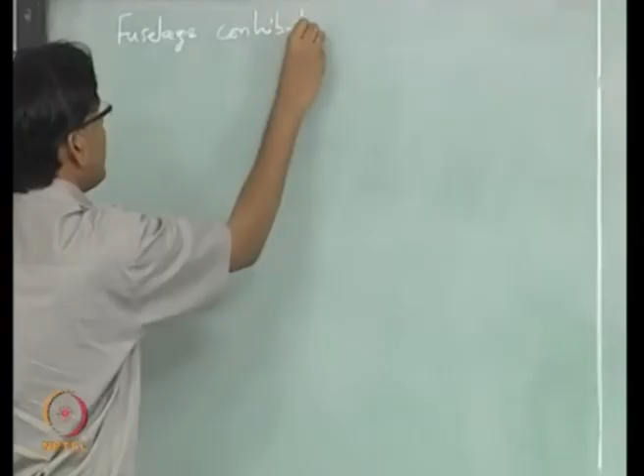Okay, so today we are going to look at fuselage contribution to CM alpha.

So there are two effects. One is purely because of the fuselage, and there is another effect which is wing-fuselage interaction. So flow over the fuselage is going to get affected by the wing. Similarly, fuselage is also going to contribute to wing contribution to pitch stability.

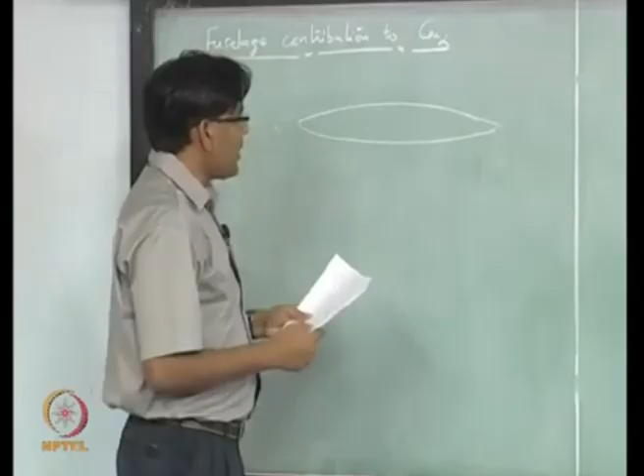As you know, most of this course is going to depend upon the data coming from the wind tunnel or based on some empirical relation. This one is particularly difficult. We just have some estimates provided by people at different stages.

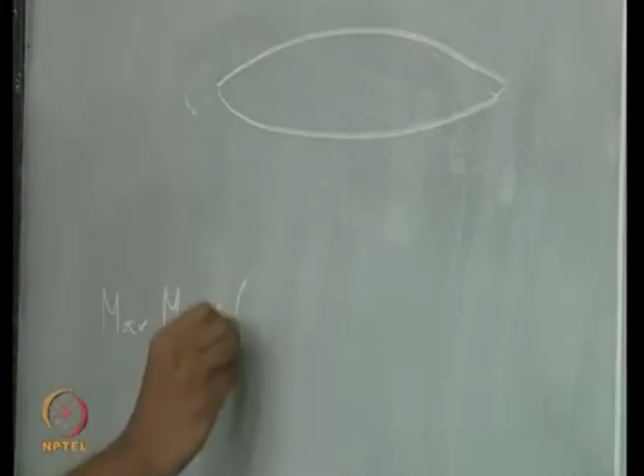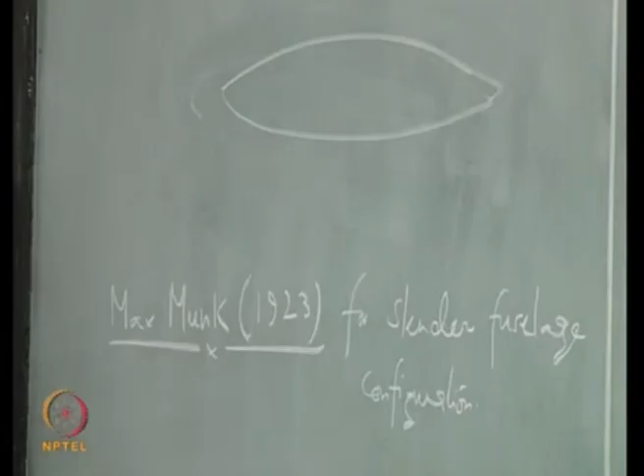So there is one person called Max Munk, who was the first person to study the effect of fuselage on pitch stability, and he gave a formula in 1923 for slender bodies. Based on his experimental observations, he gave an empirical relation.

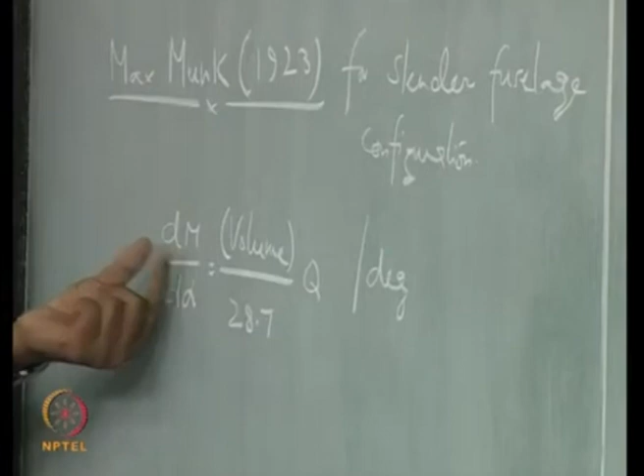This is per degree. M is the pitching moment here and q is the dynamic pressure.

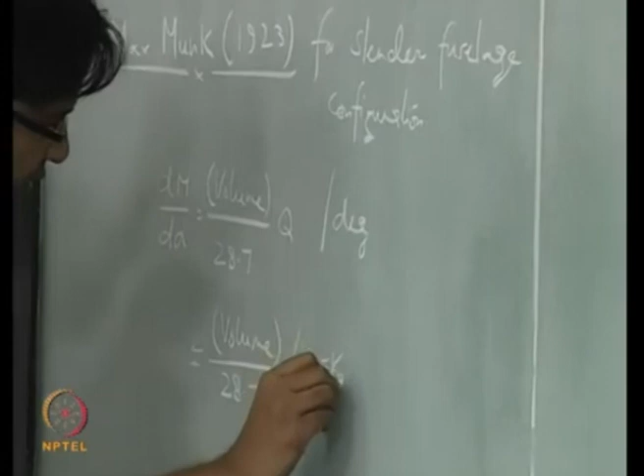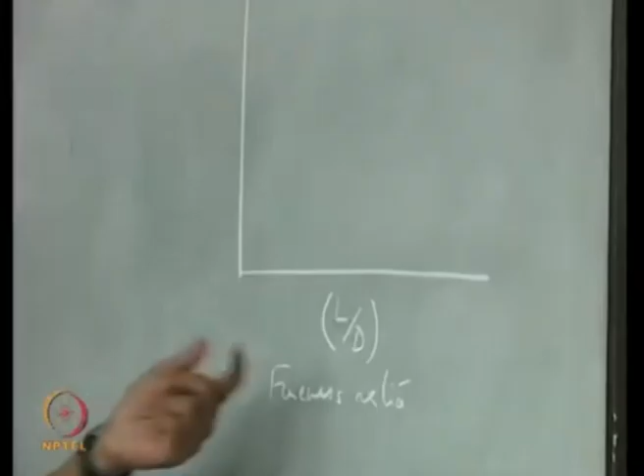Later on he also added another factor to this. This factor was to account for the slenderness ratio, also called the fineness ratio. If you want to look at how this parameter varies with the slenderness ratio, this is not lift over drag, this is length over diameter.

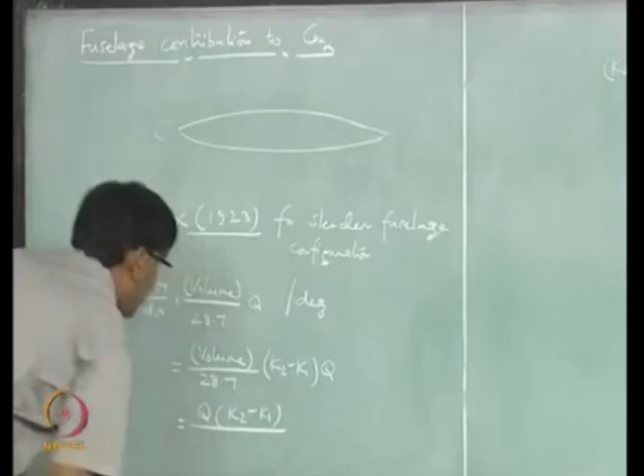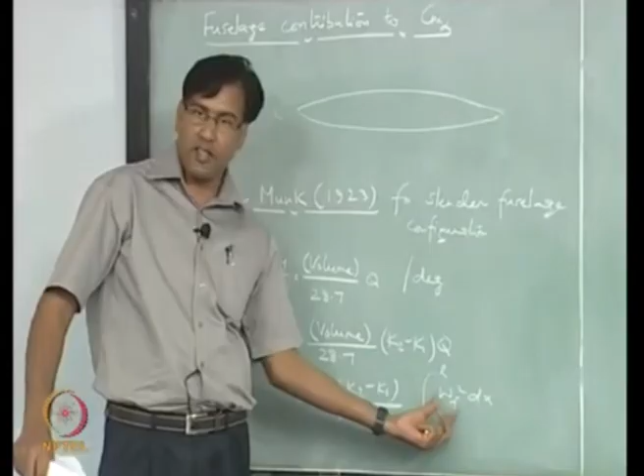Now this is like a volume. So width of the fuselage at any particular section into dx, this gives you, so it's like a squarish section, into an elemental length along the length of the fuselage, and you have to integrate this so that this becomes the volume.

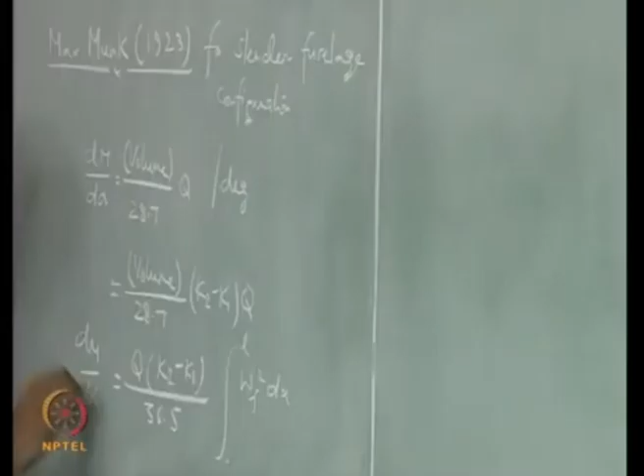They are different. You have to remember that all of these relations are based on experimental observations. So this is the corrected version of this one. If you want to talk about bodies which may not be symmetric, this is how you have to find out the volume.

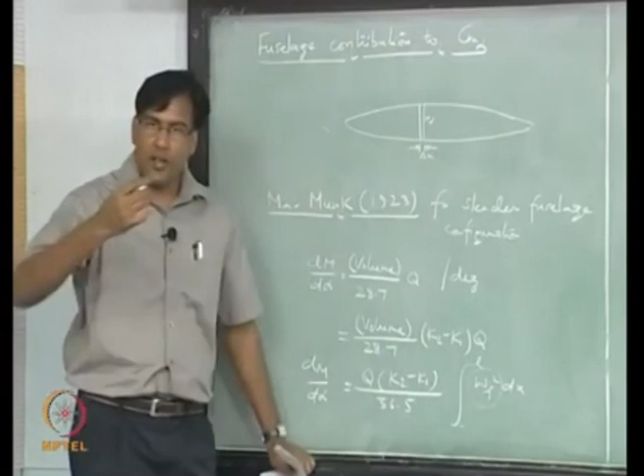So WF can be a width at any section, and you multiply it by this delta x. WF is the width of any section. So this looks like a cross sectional area into the length element dx. It's like taking it as squarish.

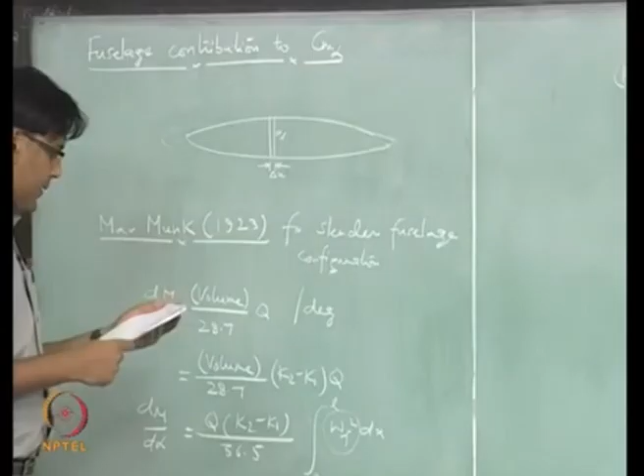You can take it as how it is. Because again, I'm repeating it, it's an empirical formula. This person gave it. If you want to know further, that may have been taken into account in this, but what he did not account for was the local flow disturbance.

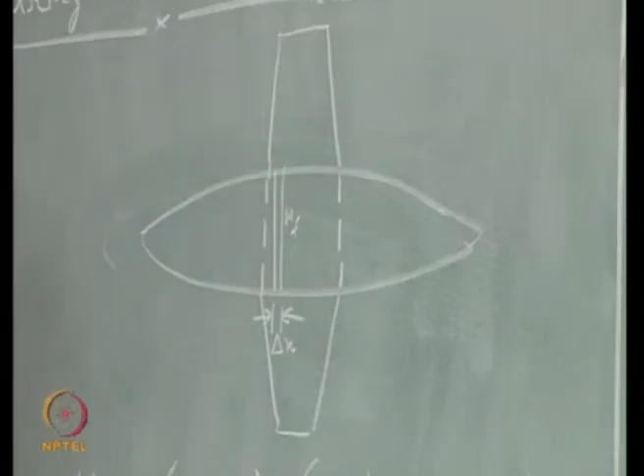So flow will be disturbed ahead of the wing and behind the wing, because behind the wing there will be a downwash created, and in front of the wing, upwash. So this portion of the fuselage, the flow that it is going to see is going to be different from what this portion is going to see.

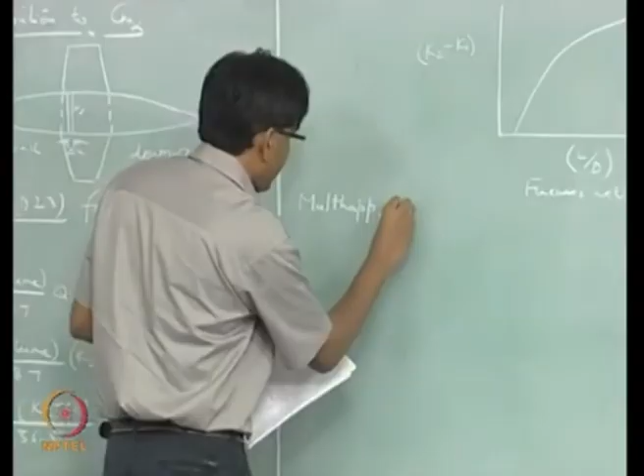And there is this person who gave an empirical relation accounting for this effect coming from the wing. So wing is the one which is going to disturb the flow around the fuselage, and that effect was taken into account by Multhopp, and the relation that he gave is something like this.

Remember, we are only trying to get an estimate because we are still at the design stage. Only after we have gotten an estimate can we build one small prototype and put it in the wind tunnel, and then after that compute all the derivatives.

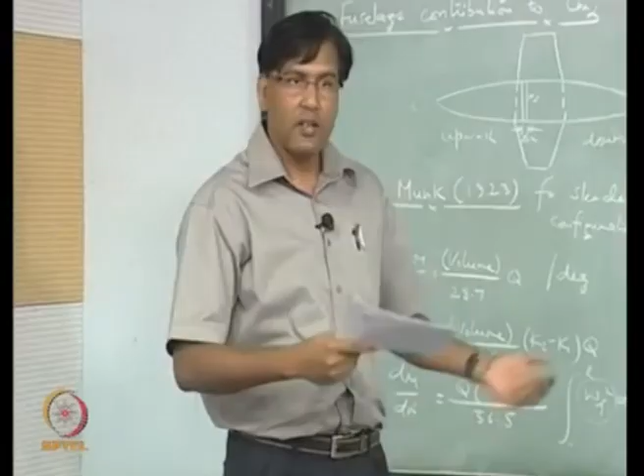CM alpha is also measured in the wind tunnel after you have done the initial design, and then you are going to see whether it is matching with what you started with or not, isn't it? So this is still at the initial design stage.

Yeah, I will tell you. So beta is the local angle of attack.

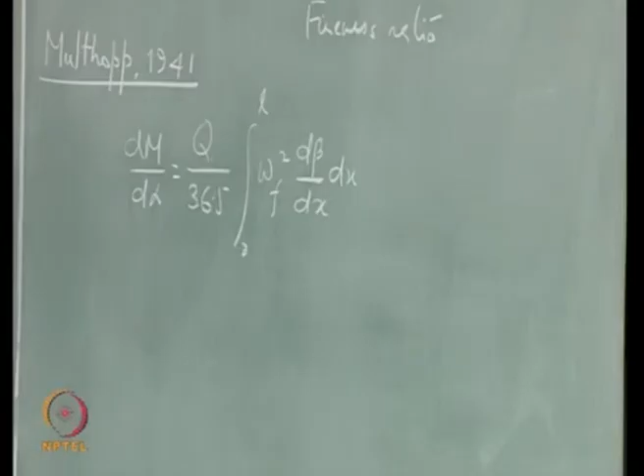Which is alpha of the fuselage reference line, and we are writing it as alpha, right, plus alpha I, which is like the effect coming from the wing.

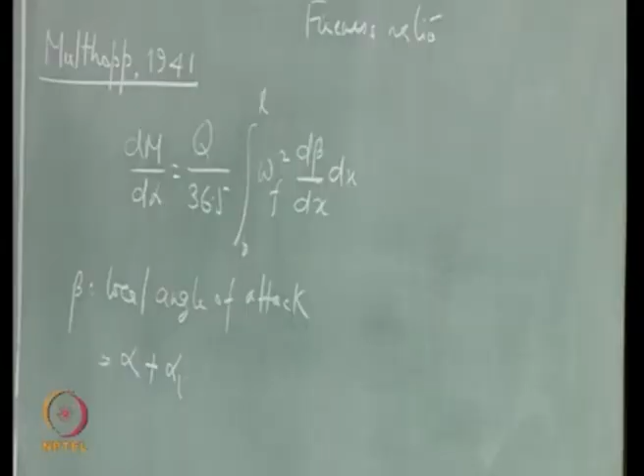Okay, so clearly in front of the wing is one, this derivative is 1 plus d epsilon over d alpha, right, and behind a rough estimate.

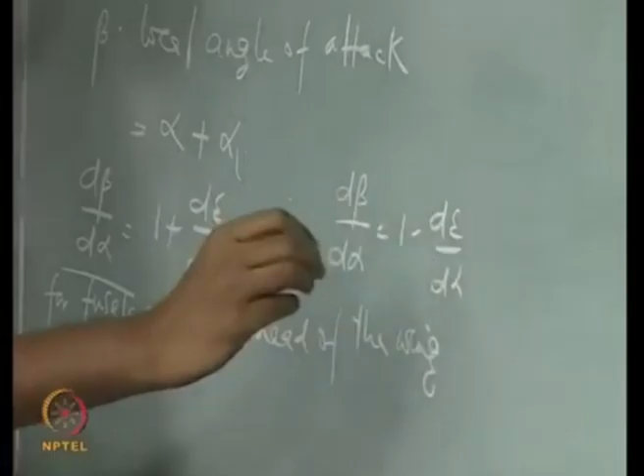So, for fuselage portion ahead of the wing, right.

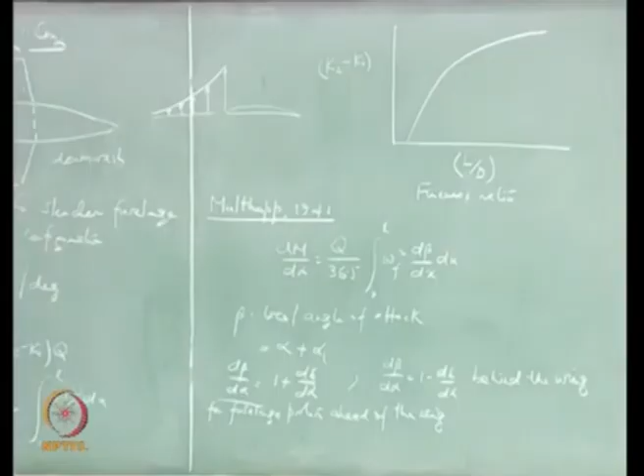If you remember, we showed that the maximum upwash is going to be around this area, right, and then it is slowly going to taper off, right. So we looked at this picture where we saw this component of velocity like this, right. This was upwash in front of the wing.

Behind the wing, the downwash is going to be maximum near the wing trailing edge, and then it is going to slowly diminish.

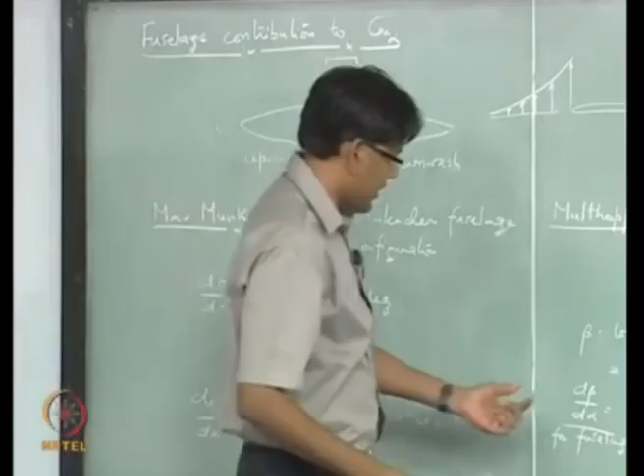So we have to be particularly careful about sections of the fuselage which are close to the wing, right, and thereby the empirical relation—again there is a curve which tells you how this is going to change as you move along the length of the fuselage away from the wing. So if you are close to the wing, then this effect is going to be more, and if you are away, it is going to be less.

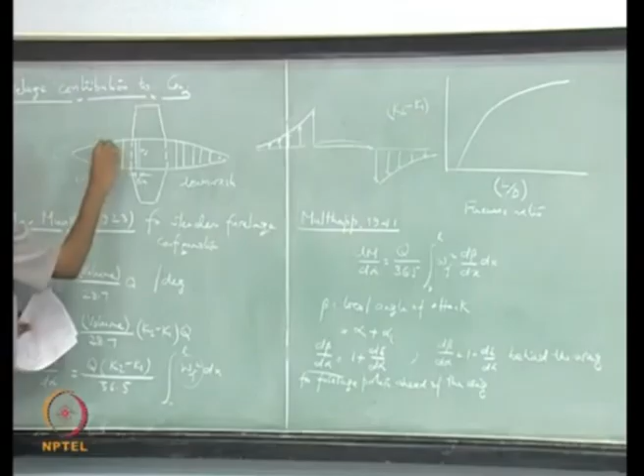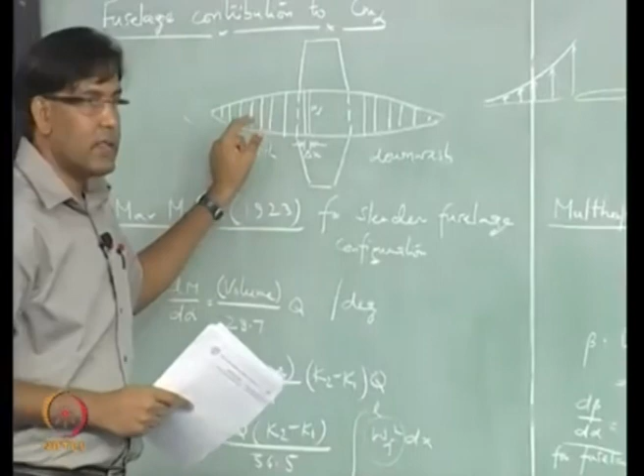Now, this is going to be different for each section, you have to remember that, and for that the relation, the empirical relation is given. So you can choose from a plot what section you are in, how much away from the wing trailing edge, or how much in front of the leading edge, right. So depending on that you can find this from an empirical curve which is given to you, okay, and calculate what this derivative is.

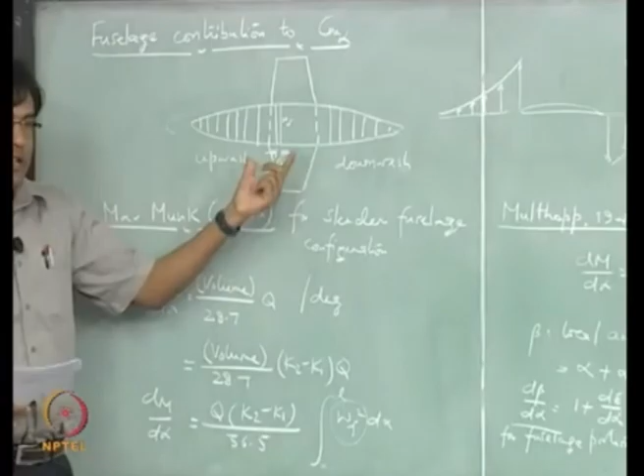Okay, so this was the effect of the wing on the fuselage pitch stability, right.

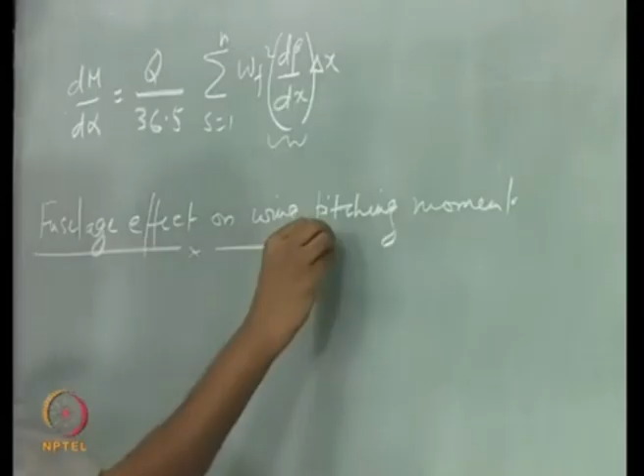Now fuselage is also changing the local flow around the wing, right, so it is also going to change the pitching moment which is created because of the wing, isn't it. So the interaction is both ways: wing is affecting the fuselage, fuselage is affecting the wing, and that effect can be estimated.

It can be a bad estimate, okay, but you need such estimates because they are going to be useful in determining the stability or the equilibrium of your initial paper aircraft, right. You are starting with some design and you want to find out all the parameters which are going to affect the equilibrium conditions and the stability.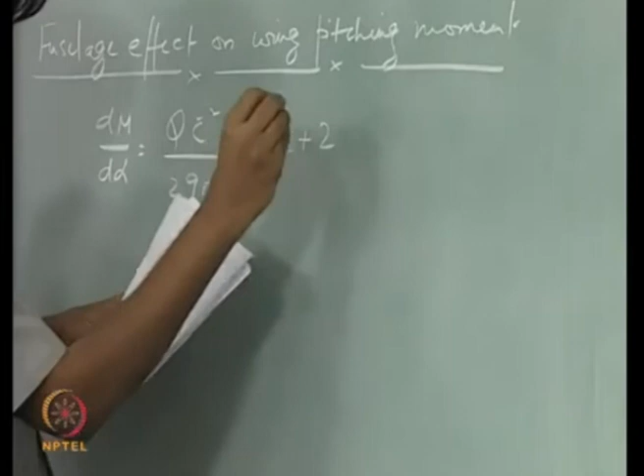Okay, so this effect is given by this formula. All of these are estimations, okay, you have to remember that. The correct value can be found only when you have put your prototype in the wind tunnel and measured the data accurately, right. Otherwise you have to trust these estimates.

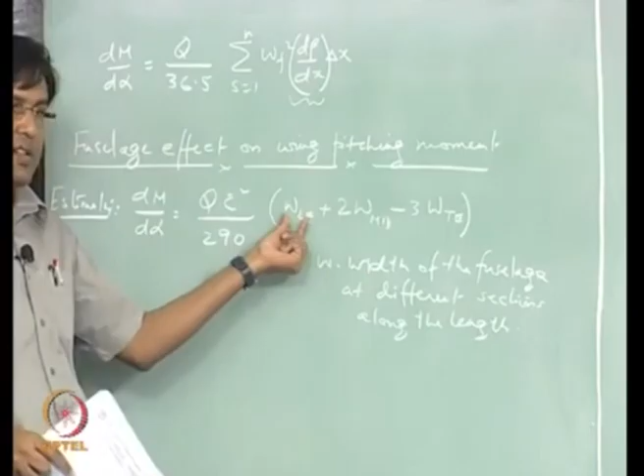So width of the fuselage at the wing leading edge location, okay, width of the fuselage at wing mid chord location, and this is the width of the fuselage at the wing trailing edge location.

So now from this you can also find out what is DCM over DCL, that is what we are doing in all the cases.

Now since this is for a body of revolution, it applies to both fuselage and the engine nacelle.

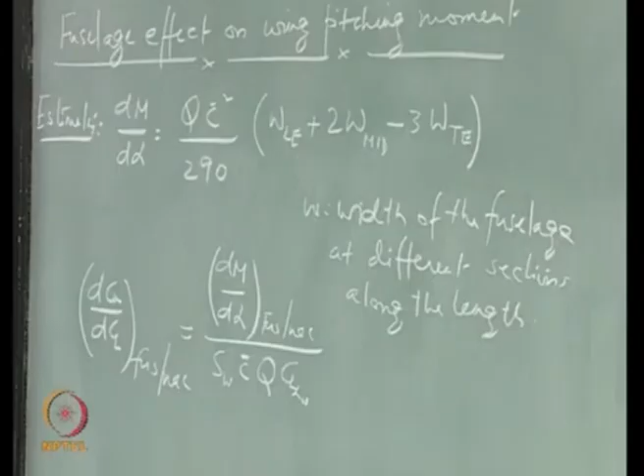Right. If you want a ready formula with less accuracy, then you can use this.

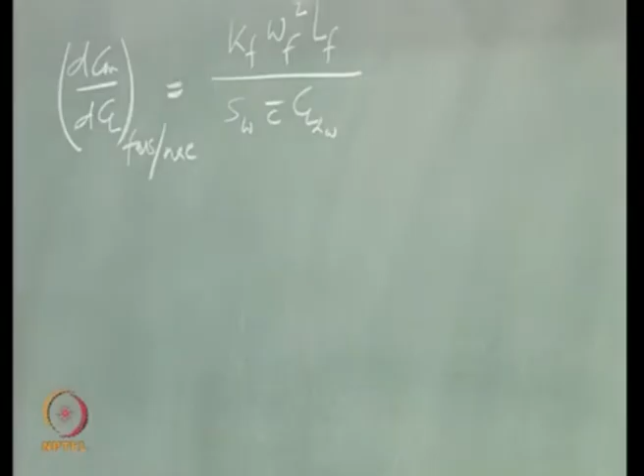So, LF here is the fuselage length, overall length, and WF is the maximum width of the fuselage.

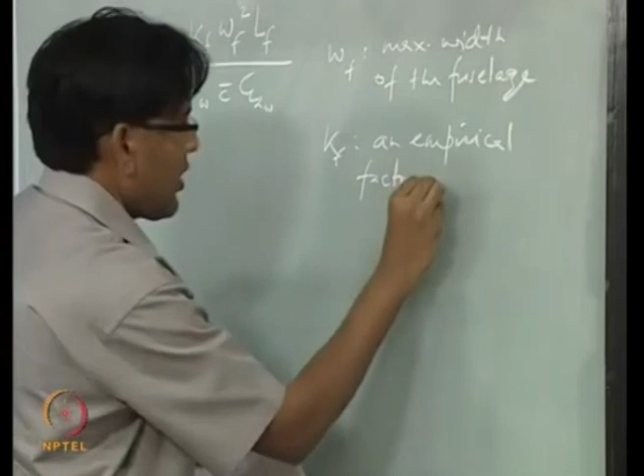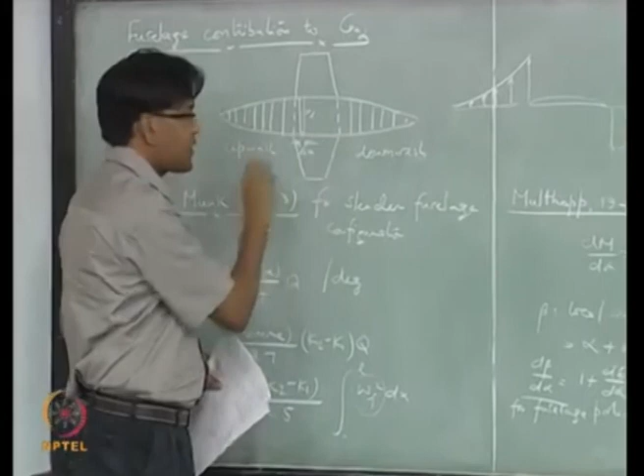Now KF is given by a curve which gives a relation between KF and position, specifically the quarter of root chord. Okay, at this chord, take this quarter of that.

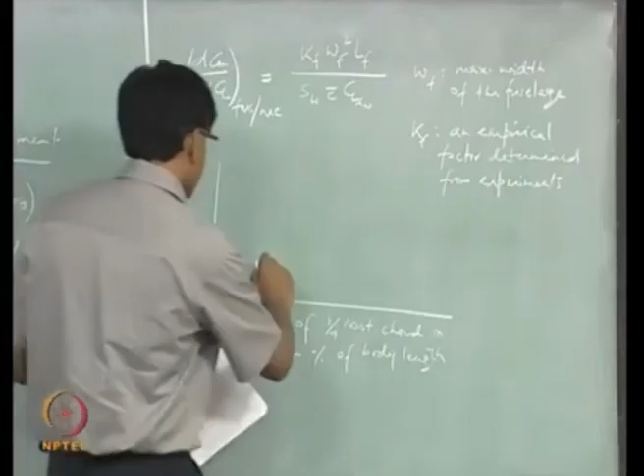I am writing body here because this is applicable to both fuselage and engine nacelle. So now engine nacelle can also be located close to the wing, and we can determine where it is located with respect to the engine nacelle. It varies something like this. I am not going to give you a correct picture; you can find this picture in many textbooks on this subject.

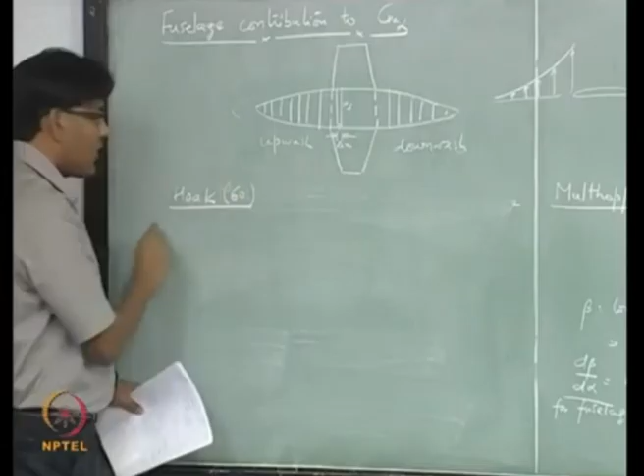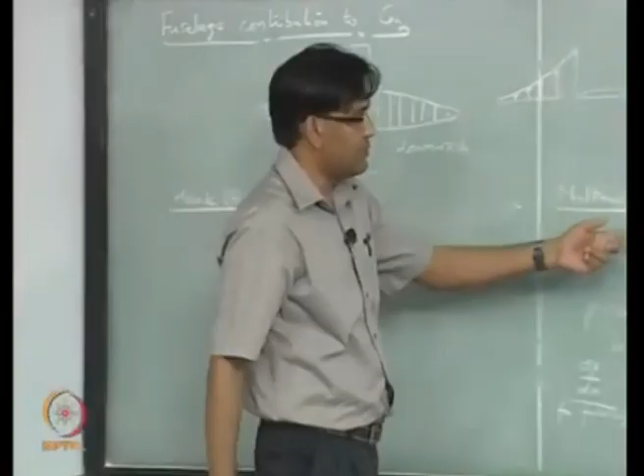So this was from 1941. There is one more person who worked on this problem, and he gave another estimate. The person's name is Hoak, and he gave this formula in the 1960s. You can find this in the book by W.F. Phillips. I think this is the only book which gives a different formula. All other books you will find these two relations.

So let us look at this. And this applies to both fuselage and engine nacelle.

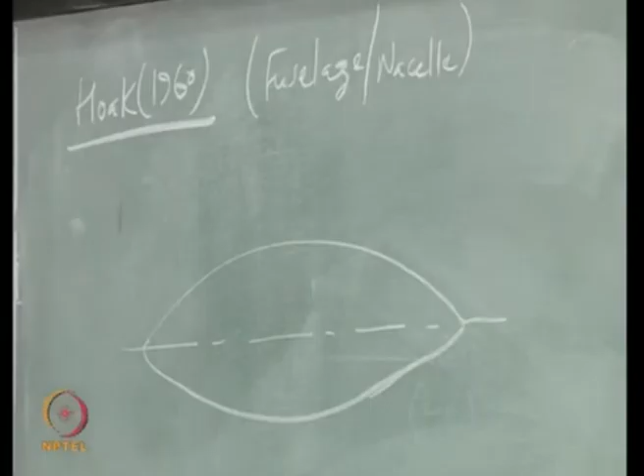He calls this length as the chord length of the fuselage. The distance between the CG and the center of pressure of the fuselage is LF.

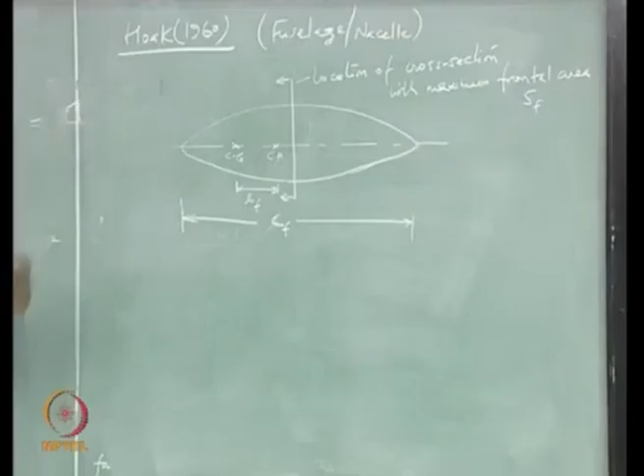So there will be an area which will be—if you are standing here and looking at this fuselage, the maximum area that you see is this SF, and that is at some location which I have marked here, and this axis is the minimum drag axis of the fuselage.

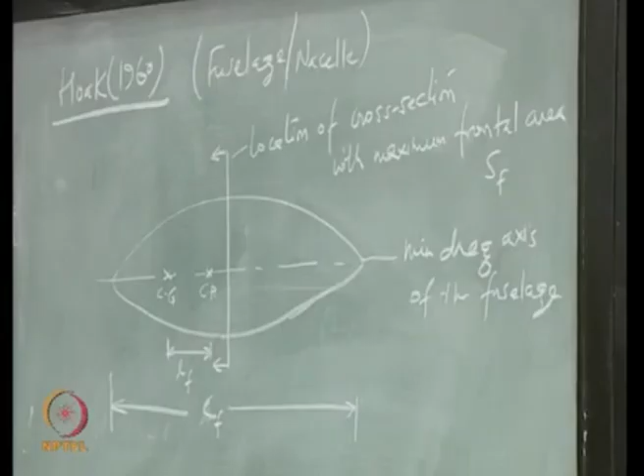This axis is different from the fuselage reference line, because any line which is different from the fuselage reference line is going to add to the angle of attack that the fuselage is going to see. So this axis is different from the fuselage reference line. If this line is the same as the fuselage reference line, then there is no extra angle of attack to be accounted for.

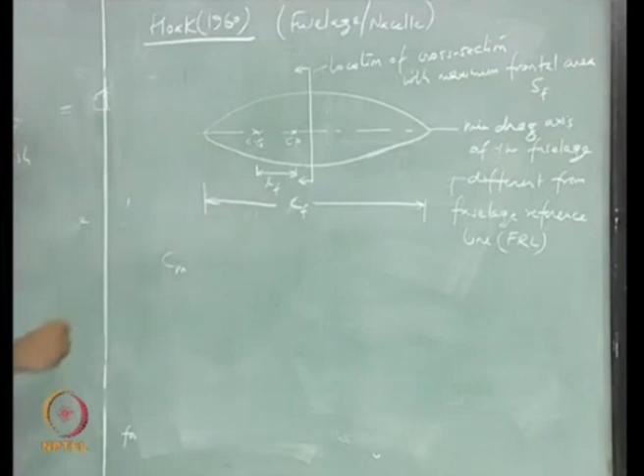Now he gives this pitching moment coefficient in terms of these parameters, and this is about the CG, which is understood.

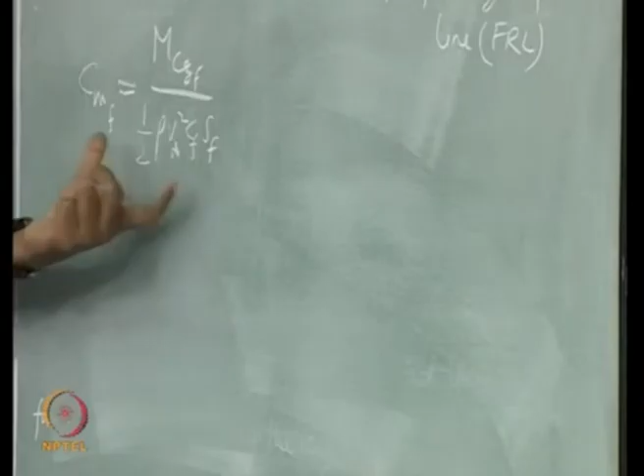So look at this, you are taking the reference which is for the fuselage and not for the wing. So finally, when you are going to add this contribution to the airplane pitch stability, you have to divide everything by the reference area of the wing. We have been taking the reference area as the reference area of the wing.

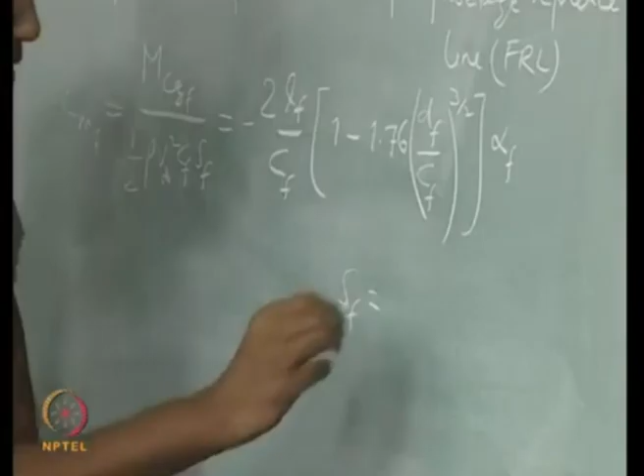This is—if you assume this SF to be a circle, then the associated diameter is this DF. So how do you get that? SF is this, so the equivalent diameter is DF for this area SF.

So this alpha f is also the angle of attack with respect to this minimum drag axis of the fuselage. If I want to now find out what this alpha is with respect to the fuselage reference line, that is going to be different.

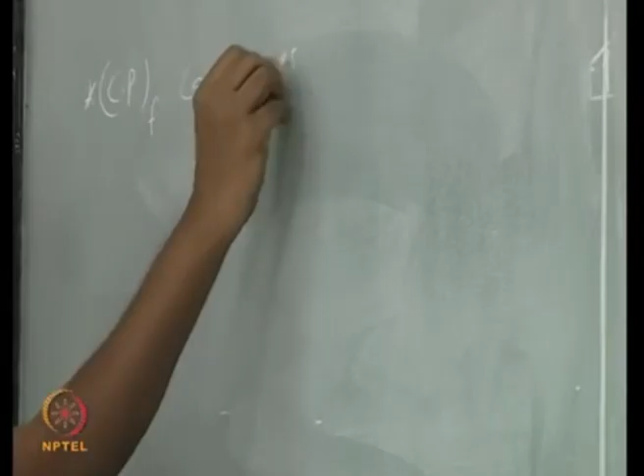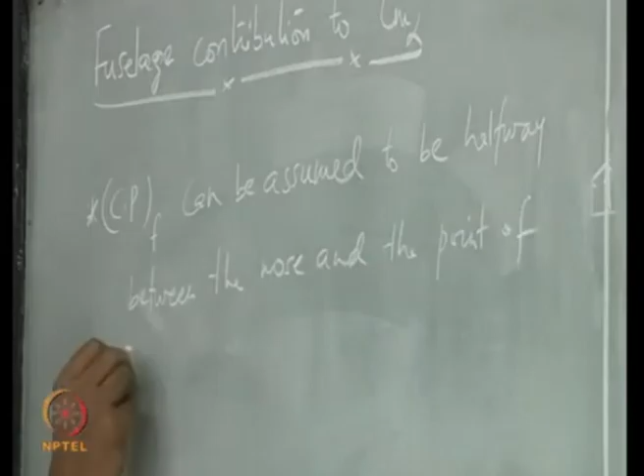Now center of pressure of the fuselage in this formula can be assumed—this location of this CP, you can take it as halfway between the nose and the point of maximum, so somewhere around this point.

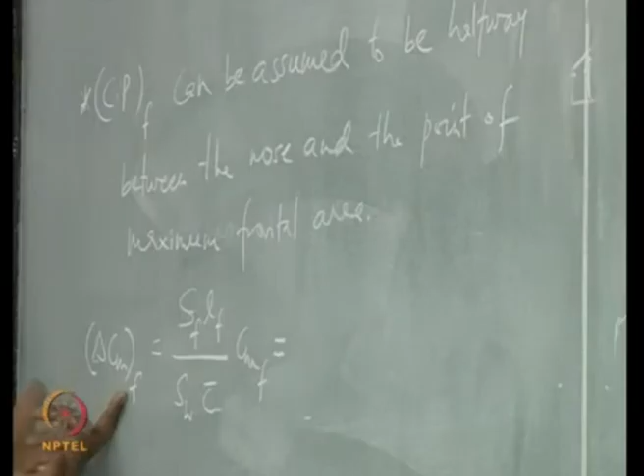So now this is the contribution to the airplane pitching moment coefficient, so you have to now divide it by the reference area of the wing. So we have to take the wing as the reference and then we can write, and here is delta Cm. We are talking about contribution from different components.

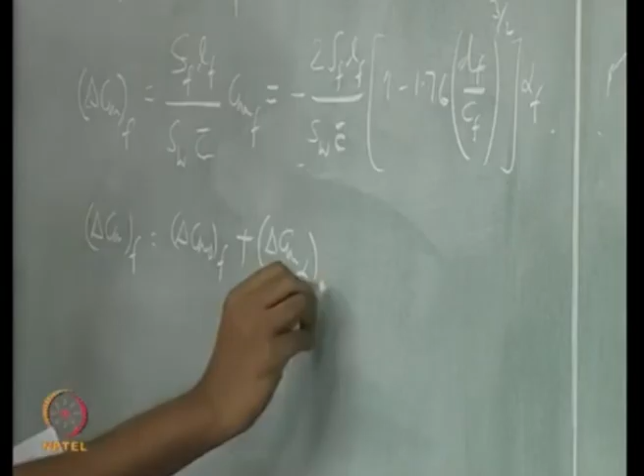So this is the contribution to the total airplane pitch stability from the fuselage. C bar is the mean aerodynamic chord of the wing.

So this same relation actually gives you the formula for this and this also. So you can write what is delta Cm naught, the contribution to the whole airplane coming from the fuselage.

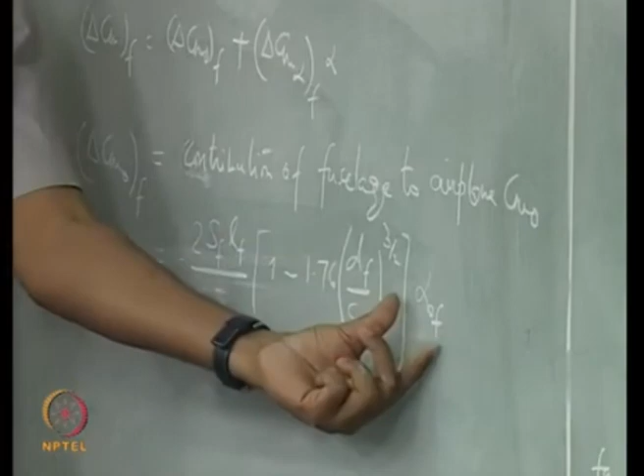This alpha naught f is the angle between the fuselage reference line and the minimum drag axis of the fuselage. So if they are overlapping, then you can say that this is zero.

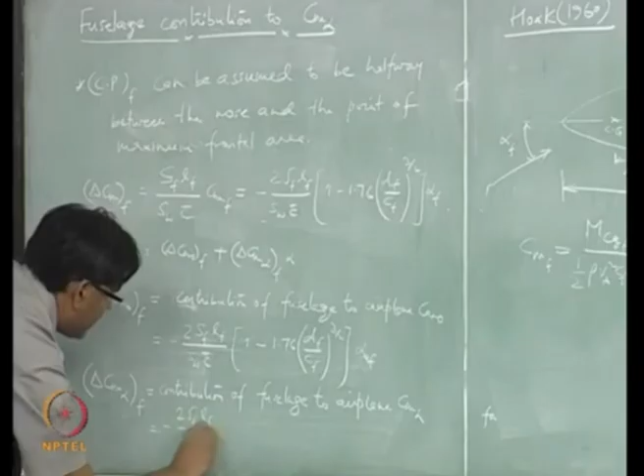So, what do you think, is this contribution stabilizing or destabilizing? It will depend upon df. So, usually this contribution is destabilizing.

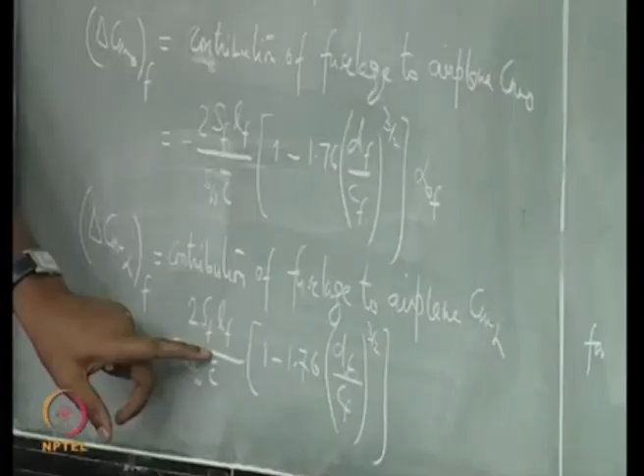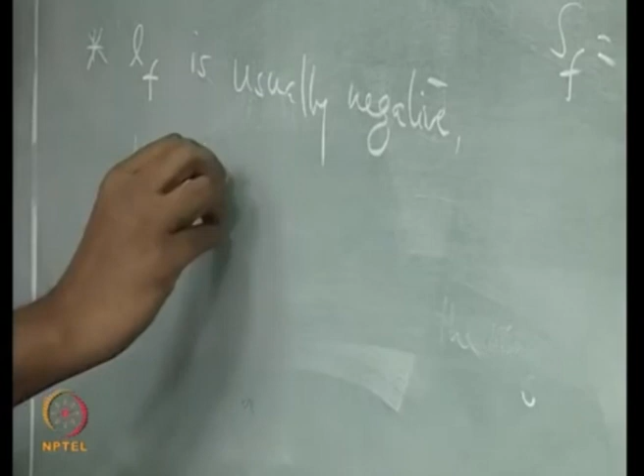Okay, LF is negative. So, let me just write the statement here. LF is... okay, so this effect is usually, the contribution is usually destabilizing, and what kind of effect is that going to have on the neutral point location or the static margin? It will reduce the static margin, right?

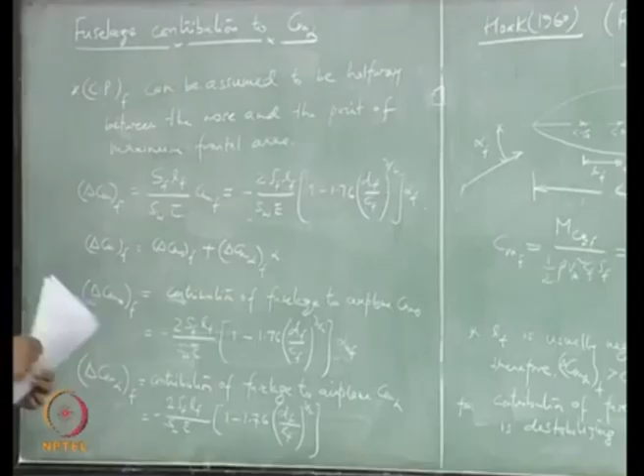So, this has to be taken into account. It is not a small destabilizing effect. This effect should be taken into account and has to be estimated while you are designing your airplane.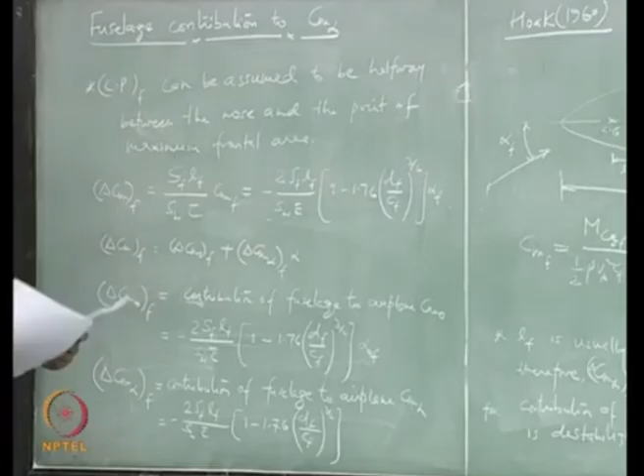Okay, the next component, we have one more component left, right? What is that? The power plant, right? So, this comes broadly under this topic which is called power effects, right? Power plants can be of different types depending upon what altitude you are going to fly, what speeds you want. So, depending on all that, you have different kinds of power plants, and they will have their own dynamics.

For example, if you are talking about a turboprop engine, then the rotation of the propeller blades is going to affect the flow field behind it, and that is going to have an indirect effect on this Cm alpha.

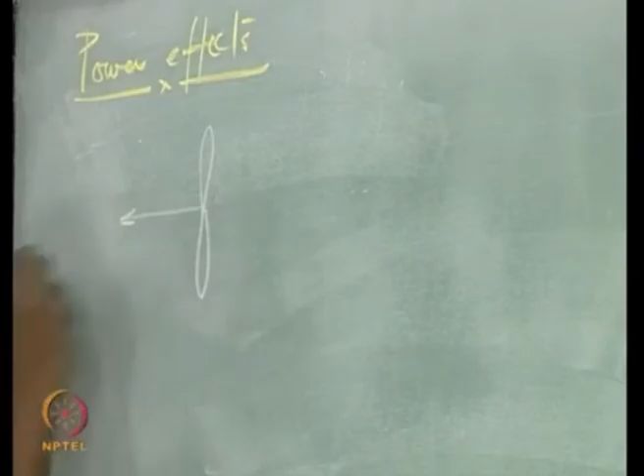Let us first look at the turboprop engine and see what kind of effect it can have. So this I will call the thrust line. Okay.

Location of CG is here, which is at a height from this thrust line. So, H is the height of the CG above the thrust line, and the distance of the propeller disc - when the propellers are rotating, in motion, you look from the front and it will look to you like a disc, right.

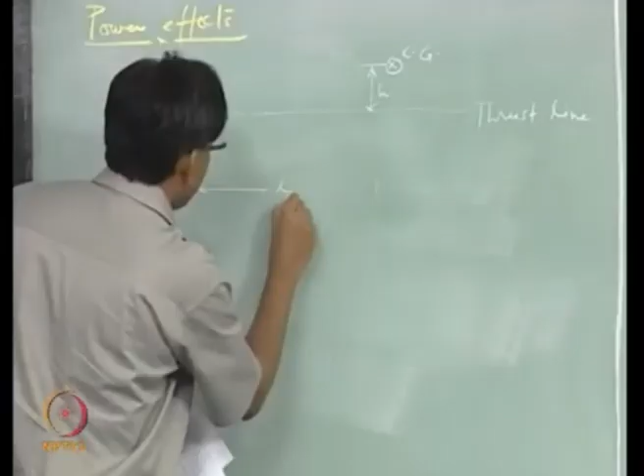So, when this propeller is rotating, then you have a force in that direction which is in the plane of the propeller disc. NP, and so this is your remote wind direction, and if it is located in front of the wing, it is also going to see an upwash.

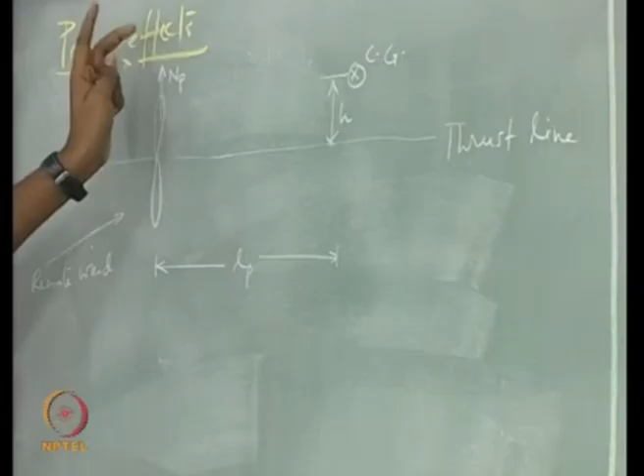Yeah. NP is the normal force on the propellers, and it will be in the plane of the propeller disc. Yeah.

No, the blades of the propeller have an aerodynamic shape. So, there is going to be a force which is acting along the blade length. There will be some unbalanced forces, right.

You can think of it like that for different configurations, right. So, that is like trying to diminish this effect. But let us look at what happens if we have this kind of configuration.

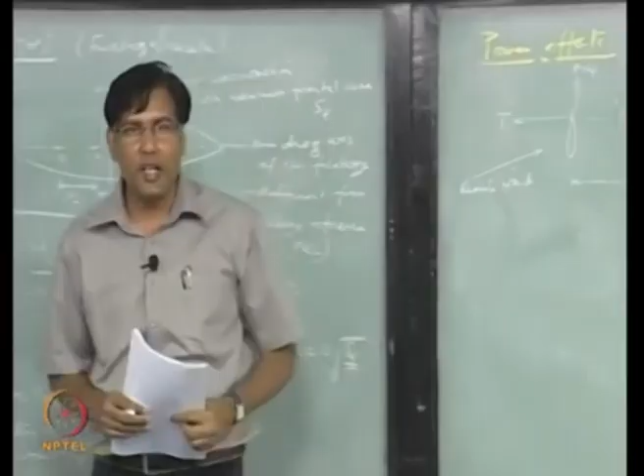So, we have one aircraft which is a Cessna in Kanpur, where you will see that before they take the airplane for actual flight, they will test everything. They will try to see if all the actuators are working fine, the engine is working fine. So, they will start the engine and make the propellers run.

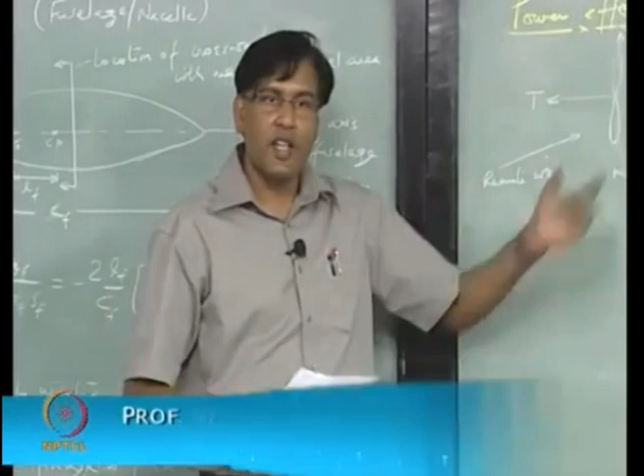So, you will see that when the airplane is not flying, it's just standing and the wheels are locked. So, you put some blocks on the wheels and then you start running the propellers, and you will see that the aircraft will have a tendency to do this, and that is coming because of this.

So, there will be a moment created when you run the engine. Where is that force coming from when the airplane is not flying? That is coming from the propeller. So, you will see this when you go to Kanpur next year. Okay.

So, I said these propellers are located in front of the wing. So, there is going to be an upwash. So, this is your remote wind, and because of the upwash, which is this angle epsilon, this vector is tilted, right? And this is the angle of attack that the propeller is going to see.

Of course, this is very complicated because the blade geometry itself is complicated. So, if you want to talk about what each section of the blade, what angle of attack it is going to see, that is going to be something different. It is a very complicated thing.

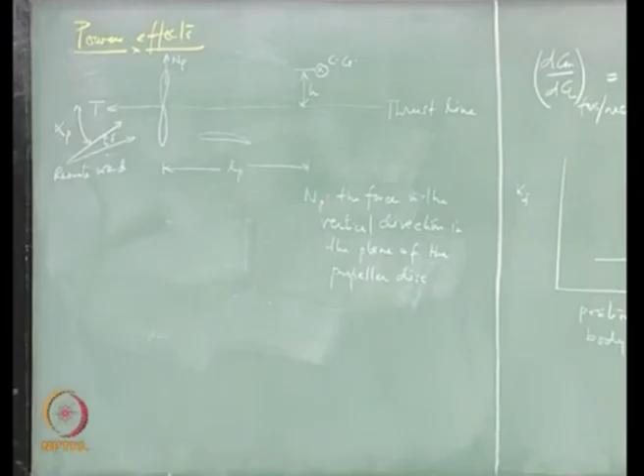So, everybody gets what a propeller disc is? Understand - when you are looking at these blades rotating at high speed, then you do not see these blades individually, but you see a disc, right? That is what a propeller disc is. Okay, so we can stop here and we will continue from here in the next class.